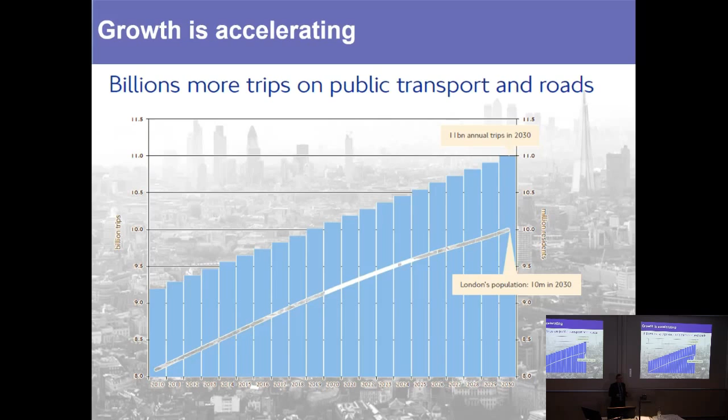That increase, just so you get an illustration of what it means, by 2030 is like taking a city the size of Birmingham and chucking it into the middle of that picture. And if you try to understand what that might mean in terms of pressure, from a London Underground perspective, that's equivalent to 2 tube trains every week.

So it's not the overall numbers that is really the challenge here. The challenge is the growth and how we keep up with that growth. If you start to take those growth figures and look at how that might affect the station environments we have to deal with, this is the picture.

This is the picture based on the amount of investment we're currently planning to make. And what this says is that 80% of those Zone 1 stations will be at Fruin Level C by 2031. Fruin Level C is more than 4.5 people a metre squared. I don't know whether you've ever stood in a telephone box with 3.5 of your friends - it's probably a pleasure you'd have to pay for. But ultimately, that gives you an illustration of just how crowded parts of these stations are going to be, and the challenge that faces us.

It renders it inoperable. You may think it's about getting passengers into these stations, but actually sometimes it's more important to get people out. Bond Street is a good example of where we've invested a lot of money in a faster Jubilee line, moving to 33 and eventually 36 trains per hour. Of course, if you can't get those people off the platform and out to enable the next train to arrive, then you have to run non-stopping. And instead of buying jewellery in Bond Street, they're whisked off to Swiss Cottage, where all you can buy presumably is a cuckoo clock.

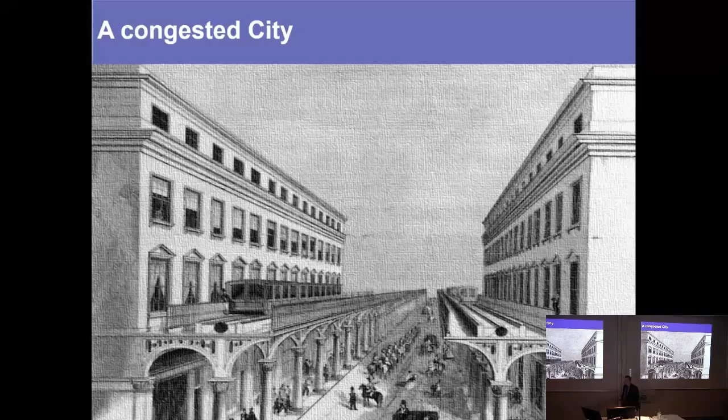Several ridiculous ideas were formed as to how we could get people from the outlying terminus stations into the centre of London. This is the Great Victorian Way, an idea by Paxton - I suspect it could really upset your afternoon tea to have that thundering past your living room window. But in fact it anticipated the route of the Circle Line eventually, though it didn't fly. This is a more amazing idea - transporting people in a vacuum tube. I couldn't find any reference to how you were going to breathe, but anyway, I suspect it could form havoc with your top hat.

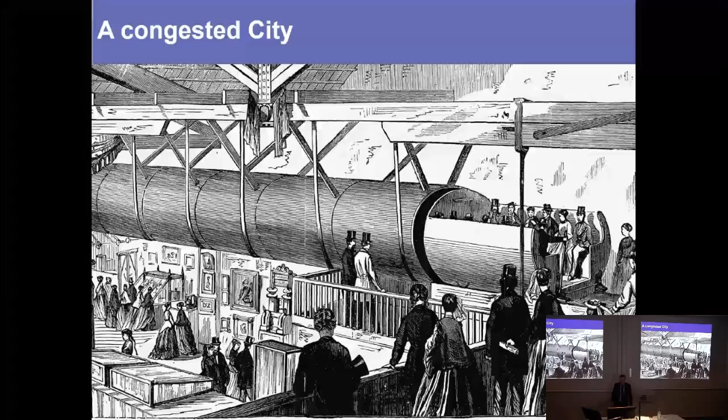And into the middle of this came this lunatic. Charles Pearson was a solicitor to the City of London, and he was a real reformer - emancipation, trying to take bribery out of juries, penal reform, universal suffrage, capital punishment. There didn't seem to be an issue in which Charles wasn't engaged. But one of his great interests was transport, solving this problem.

He had previously suggested a single train station in the centre of London near Blackfriars, but that had been turned down. In the late 1850s he starts to release these pamphlets proposing the concept of underground railways. You can imagine the reaction from the top-hatted, horse-drawn, manure-splattered hoi polloi of Oxford Street - he was immediately pilloried, and there is plenty of evidence to say that. But Charles kept going and actually managed to get this idea accepted.

Here is a picture in 1862 of Gladstone and Fowler, an early underground engineer, on a trial run of that initial line. Unfortunately Pearson didn't make it to see this - he died in 1862. Typical of the man, actually, that he was offered a great deal of money by the railway company but turned it down. That money was later given to his widow.

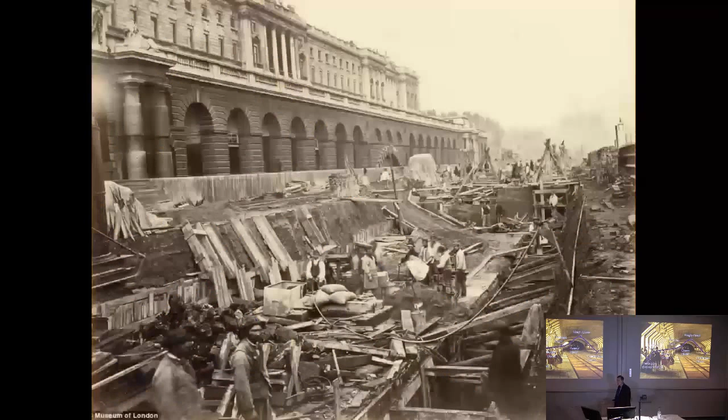Following this initial success, there was a real drive towards creating this capacity to take away the challenges of Ludgate Hill. This is just outside Bank in the 1880s. And of course today we've returned with our partners Dragados, and we are creating similar chaos, although everybody is wearing hard hats now. But we're renewing some of those early capacity drivers.

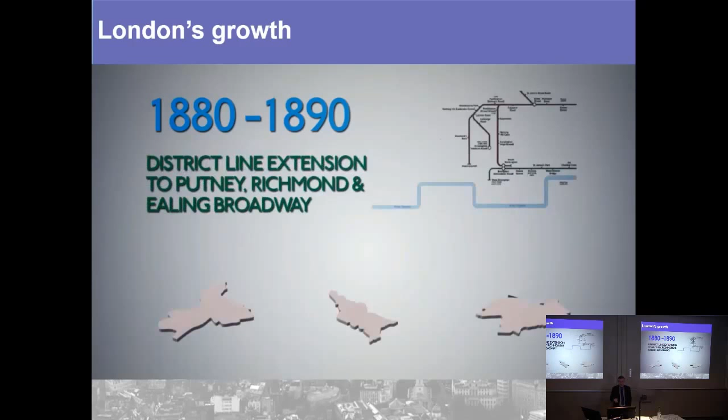And this continued - here you see the growth that was created as these lines were built over a 10-year period. The District Line linking these villages together to create commuter traffic, then some really dodgy property deals as the Metropolitan Line is extended to Aylesbury. Then the Northern Line extension to Morden, which I'll talk about in a minute, opening to a working farm. The Piccadilly Line extension to Cockfosters, 5 of those 8 stations to Cockfosters underground. The Northern Line extension to High Barnet.

And then after the Central Line extension to West Ruislip, as you step through that, I've gone back to the Office for National Statistics. So in those infographics you see the rise in population that's being driven every time you extend these lines. So maybe Kevin Costner was right - build it and they do come.

Here's a picture of Morden in 1890. It's a bit out of focus, apologies for that, but as you can see it's just a series of fields. And here, on the site of Morden Station in 1920, a working duck farm. Now, can you imagine going to George Osborne today to say, I'd quite like to build a very expensive railway to a duck farm?

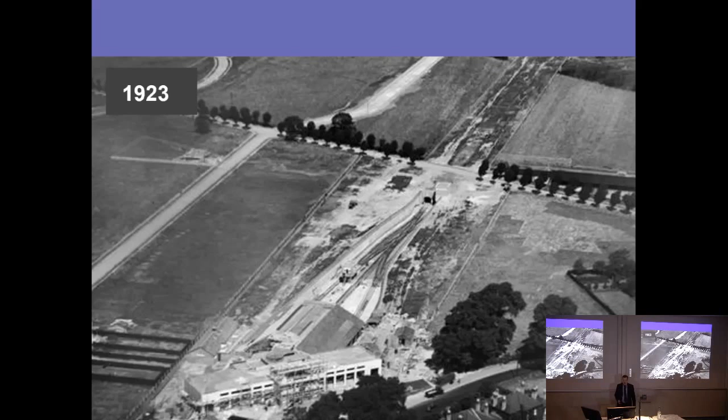But it really gives you a sense of how adventurous this exploit had become, that they were really building a new London, a new suburbia when they were extending these lines. And here in 1923, the commencement of that, in open fields as they build Morden Station - this is also 1923, but actually Morden was completed in 1926.

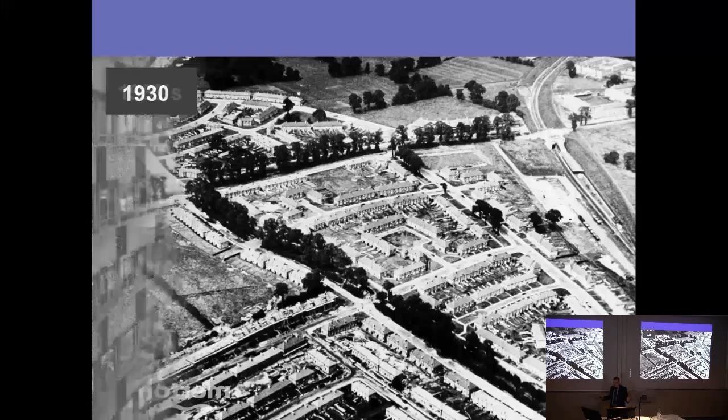And just four years later, you see this explosion of housing around Morden Station. And as you track through to the 50s, how that's built, we start to get high-rise. And then in the 2000s, I arrived - I didn't live too far away - and if you were sitting there in a car outside Morden Station, you might be able to get out of London within half an hour. Just an extraordinary expansion.

And there were some very extraordinary people behind all of this. This is Albert Stanley, later to become Lord Ashfield.

He's somebody who was born in the UK, but he left school at the age of 14 and joined the Detroit Tram Company. By the age of 17 he's running their timetable, and by the age of 20 he's running the company. He then takes four years off and goes into the Navy, and by the time he is 30, he's running a very major transport organisation in New Jersey, an organisation of 25,000 people. So he's obviously an extraordinary person from that.

But the thing he brings to this story is that he comes back to London and he forms the Underground Electric Railway Company, bringing together a number of disparate businesses, some of them loss-making, to start to build this gravitational effect around the way that we treat transport in London.

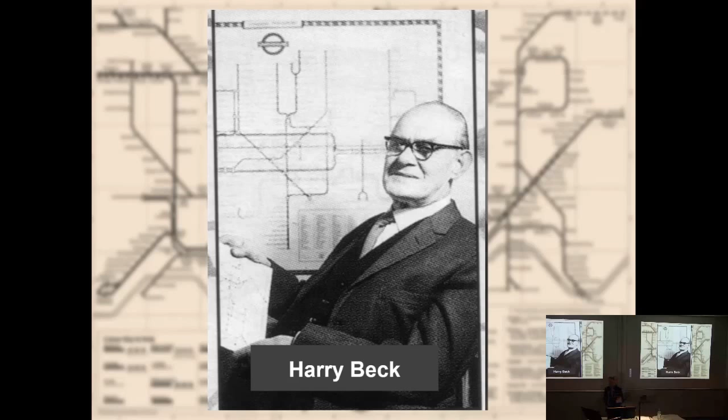And this chap doesn't really look like an innovator, does he? But actually, I think he speaks to how London Underground innovates. This is Harry Beck, an electrical engineer who, in his spare time, developed the London Underground map. He was rejected on several occasions by the design committee, and indeed I think they tried to make him redundant halfway through this process, and never really gave him the credit that I think he deserved for developing that map. I think a lot of the innovation that we talk about with London Underground comes directly from these people.

Now, I've built you this little animation. So I went back to the National Statistics Office and I looked at the population of all of these boroughs.

I wanted to build an animation showing how the city has shaped over these 150 years. In 1860, just before we arrived, you get this very centralised, dense population in the centre of London. Now look what happens: that central density starts to be taken out, and as the transport system progresses, you get suburban development, which allows the city to grow across the board. I think that's a great demonstration of what transport has done for the city.

I don't know what the people of 1850 might have thought, what Charles Pearson might have thought about what he was seeking to create when he engaged on this journey, what all of these people thought they would end up with. It seems incredibly unlikely that they could have foreseen this. But there's no doubt that what they did has enabled this.

It's interesting, how should we see the city of the future? How can we push our imagination about what London will be in the future? You might say that we're dense enough, that how could we fit any more in? But actually, when you look at the centre of London, we're just a quarter of the density of Paris.

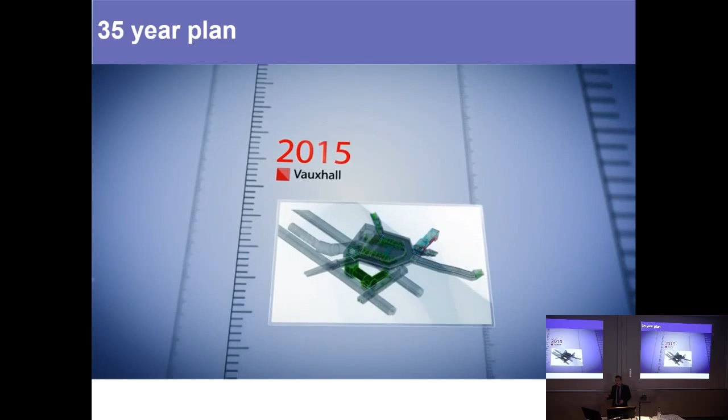And so we're trying to move to these much longer term plans around stations. Some of these are already underway: Vauxhall, Bond Street, Tottenham Court Road and Victoria. We're about to start on Bank. Trying to get these long-term plans which flow from the capacity forecast that we're making helps us align the property interests and stakeholder interests around those, and plan efficiency of our asset replacement programs.

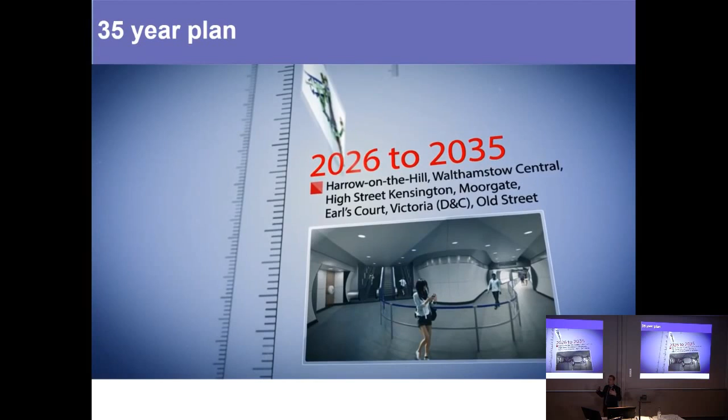And it also helps us articulate the effect of varying financial background and how that leads to inefficiencies. And you may say, well, this is ridiculous to have a plan to 2050 in an environment where you don't know how much money you're going to have tomorrow when the mayor arrives.

And I think my answer to that is that planning is a good starting point. The mayor has a plan to 2050. We should react to that. And I think most importantly of all, Paris have a plan to 2050. And in this year, the 200th anniversary of the Battle of Waterloo, I'm damned if I'm going to be beaten by the French.

I just wanted to talk through some of these schemes. So this is Tottenham Court Road. It's a busy interchange of Oxford Street and Charing Cross Road. Nobody could have anticipated 140,000 people through this station a day at the time that they built it.

This shows you the complexity, the quantum of the work that we're doing there. So in yellow, on the site of the existing ticket hall, we're building a ticket hall that is 6 times the size of that existing ticket hall. In orange, new access routes down to the central line, which allow us to create this more uniform density along the platform, which gets us better dwell times.

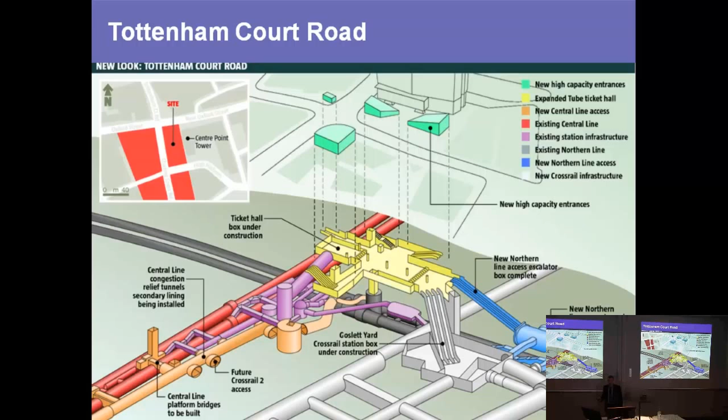In blue, new links down to the Northern Line to get more capacity at the extremities of the Northern Line platform. And then in grey, cutting across the integration of Crossrail and the Crossrail tunnels coming through at that end of the station. When Crossrail kicks in, that 140, 150,000 goes to 200,000 a day. And above you see new entrances.

I'm just talking about some of those technical challenges. I've just taken this cut across the model. Right in the middle, you can see a circle. And that circle is the Crossrail tunnel going through, across the central line in red and under an escalator incline in blue. This tunnel boring machine is the length of a frigate.

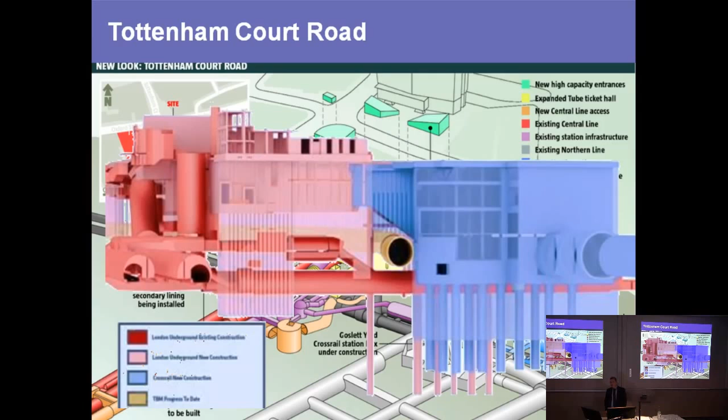You'll see a picture of it later. And I can tell you that the space above and below that tunnel to the two structures above and below is less than a metre. And we kept the central line running while we did that. I think that's an extraordinary achievement by that team.

This is the old ticket hall. When 2 trains arrived, it couldn't cope. It just became full. So this is designed for the new ticket hall. You see the new entrance area from the pavilions. And we've opened it now. On the right-hand side there, you see the new entrance that's going to go down to Crossrail.

On the left-hand side, then, the entrance area down to the Northern Line extension. And here are the 2 pavilions in front of Centre Point, which recreate the urban environment. And already, and it's a feature of these developments, you see people investing money in the area. And you see the retail values, incomparable retail values at the west end of Oxford Street, globally incomparable values, sweeping up towards the eastern end.

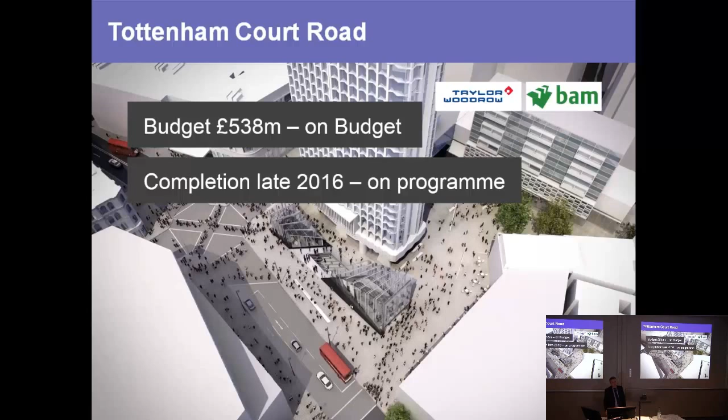And this will change that area of London to the point where it is unrecognisable within the next 5 to 10 years. I just wanted to mention our partners there, Taylor Woodrow and BAM, a joint venture, who have done, as I've shown you, a tremendous job on that project. It's on budget and it will be completed later this year. So you'll have half open now, you'll have the whole station by the end of 2016.

So the greyest picture I can find of Bond Street. Bond Street Station is about creating a new entrance on Marylebone Lane by the Tanzanian Embassy and under an existing listed building.

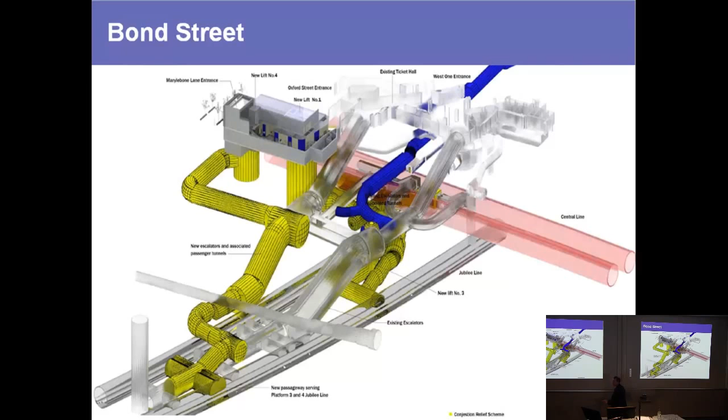In yellow you see the new links down to the Jubilee line, which allow us to spread this density down the Jubilee line and fully utilise this 36 trains per hour. In blue, the link to Crossrail, also new links down to the central line. A rather challenging piece of engineering where that all comes together at the crux of that hockey stick, which would be the subject of a whole new lecture.

If you thought there was plenty of space underground, I thought I'd bring you this, to show you just what's in the area. Underneath here we have the existing ticket hall, and on the top right-hand side the new Marylebone Lane entrance. And you see the problem with utilities there.

Those blue things going across the centre of the picture are water mains, cast iron water mains installed in the 1850s - a 30-inch, a 21-inch, and a 20-inch, I think, from memory. And these things, if they crack, they don't leak, they explode. Having those right above a ticket hall brings memories of Balham, when 66 people died during the war because one of those water mains flooded the ticket hall.

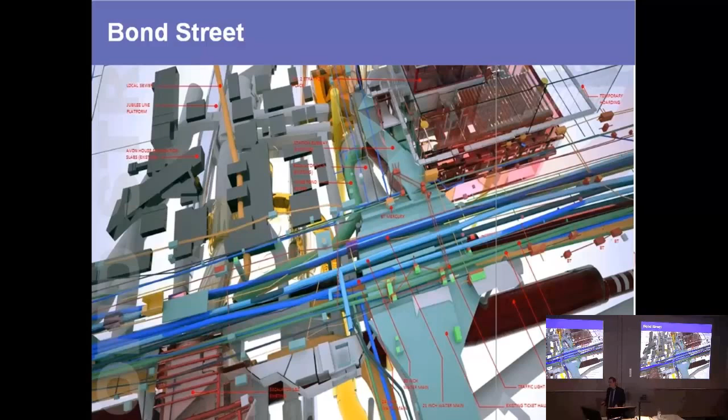So utilities are a major risk for us. Before we got anywhere near Bond Street, we had to dig up the whole of Oxford Street. Imagine all the sensitivities there around the retail quarter and how we were protecting people's businesses, and the sort of chaos that can cause. It's a very intrusive process. So that's some of the challenges we're facing there.

This is the new Marylebone Lane entrance. Again, we're on programme, and we're in good shape to finish in the spring of 2017 with the Costain Laing O'Rourke joint venture.

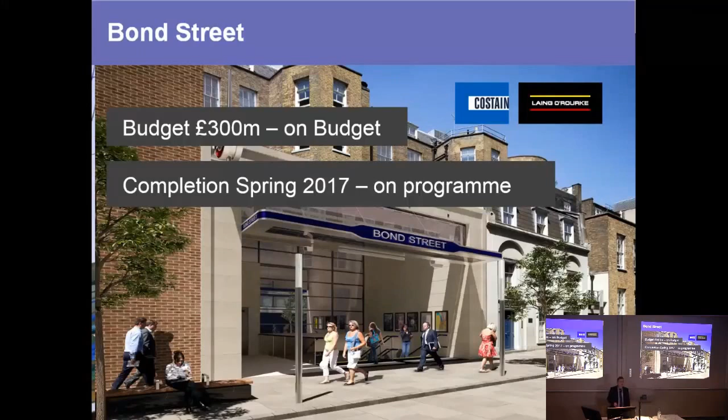Before I got Victoria, we used to sit around the table with some intractable problem, look at each other and go, yeah, but thank God we ain't got Victoria. It's a nightmare area. The ground conditions, it's made grounds and gravels. There has not been a tunnelling job at Victoria that has ended well. So it's a phenomenally challenging scheme.

This doesn't tackle, because of cash constraints, the district and circle line work that we'll have to do later. We're doing this job in two halves simply because we haven't got the money to do it efficiently and together.

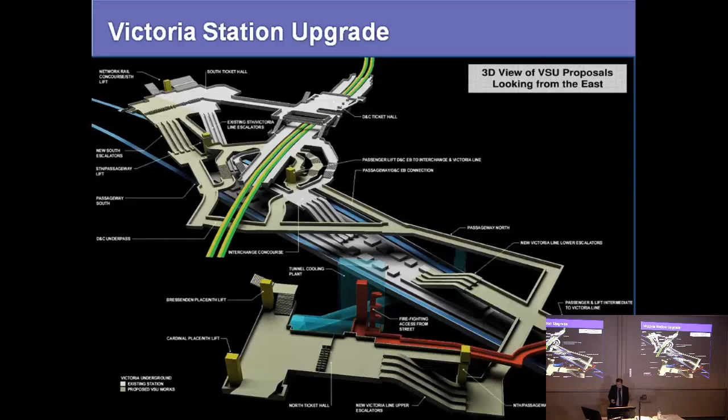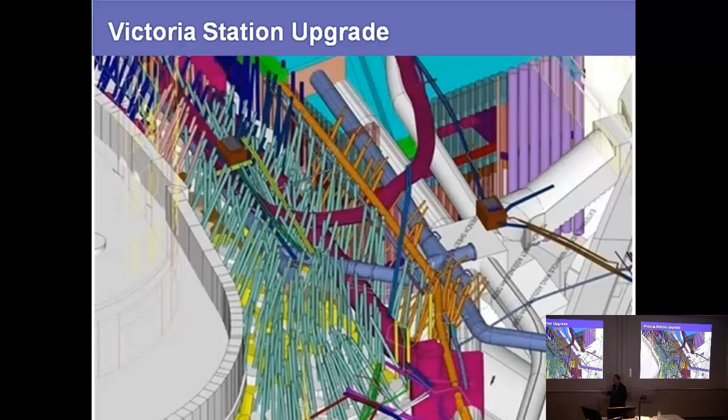Another piece of digital engineering, this showing the jet injection grouting columns that meant we could full-face tunnel through grout. This shows you the view over a road. We had to sleeve all of those grout positions between the existing surfaces, take sections of the road before we could do that ground treatment. And in fact, those grout positions, those column positions, are all set out directly from the model.

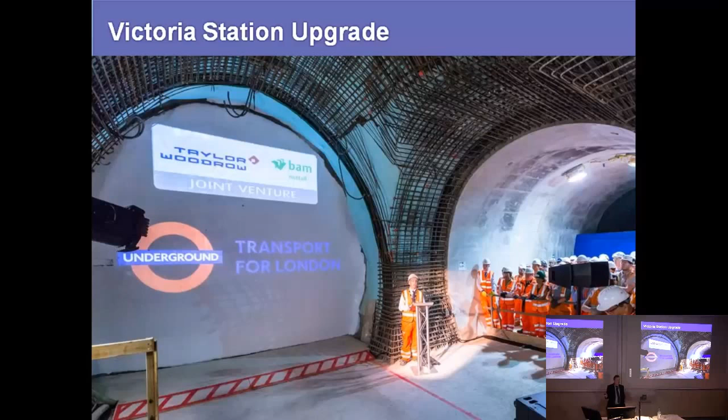This was a great day, because this is the first time - as the tunnelling is completed - this is the first tunnelling job that ever went well at Victoria. It's a fantastic achievement. Here's a view of the northern ticket hall, and here are the entrances, here's the entrance outside the Network Rail Station - again on budget, on time to finish in 2018.

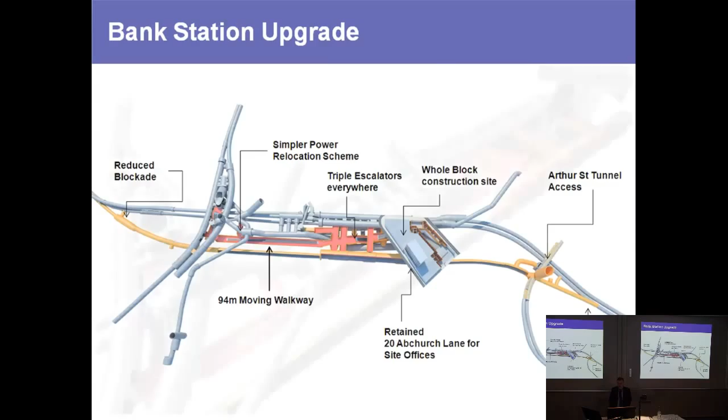Bank pushes the challenge even further, because it's absolutely at capacity. Bank closed 63 times last year because it was just too crowded. There's an amazing operational team down there that reconfigure Bank throughout the day to try and use the station they've got to keep it working.

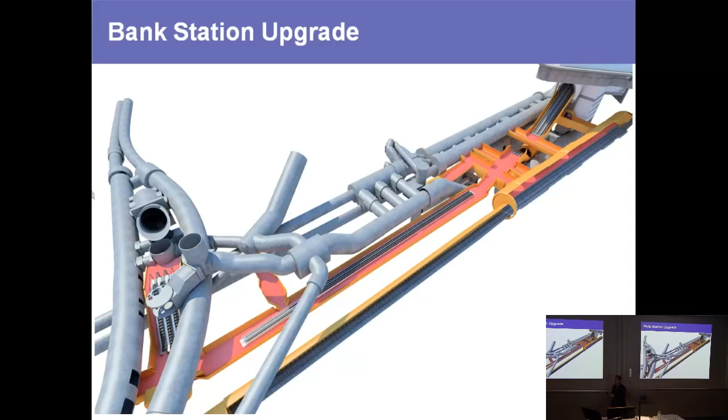The solution there is to realign the southbound running track of the Northern Line so that we can create a central concourse, and then put a new entrance in the middle of this very distended station, so that we can create vertical capacity in the middle of the station.

This is the new platform on that southbound tunnel, going in for 2021 with our partners Dragados. Interestingly, we tried a new procurement process with this, and it speaks to how working more closely with the market can bring tremendous results. We produce more capacity in this country on these station projects per pound than anybody else in the world, so we're very good in terms of getting value out of the money we spend.

Yet we went out to the market to market test the solution. It had so much latitude in it that you could have come back with an app - you could have solved it with a pure technology solution. So we allowed the innovation to breathe. All four bidders came back with a much better solution, and the winning bid fundamentally changed the layout of the station. The result was a value improvement of 50% against our own business case. I think that's a real testament to looking again at how we work with industry to get much better improvements. Yes, there was a 23% reduction in cost, but when that's forgotten in 50 years' time, there'll be a 90% improvement in journey time. This will be a machine that works better for our customers in the future.

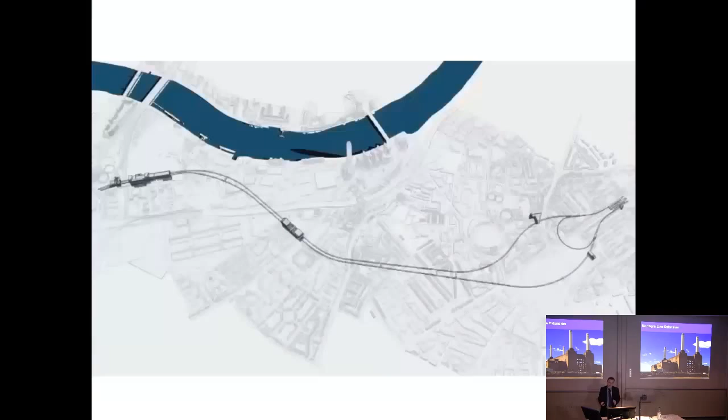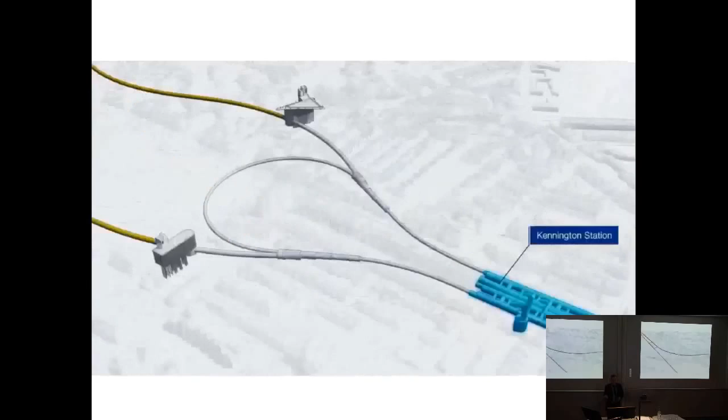This is the Battersea end of that job. You see the overrun tunnels under the Battersea Dogs Home, the Battersea Station and the crossover box, Nine Elms serving the American Embassy and the regeneration area, and then the connection into the Kennington Loop. The first extension of the underground for a very long time - decades.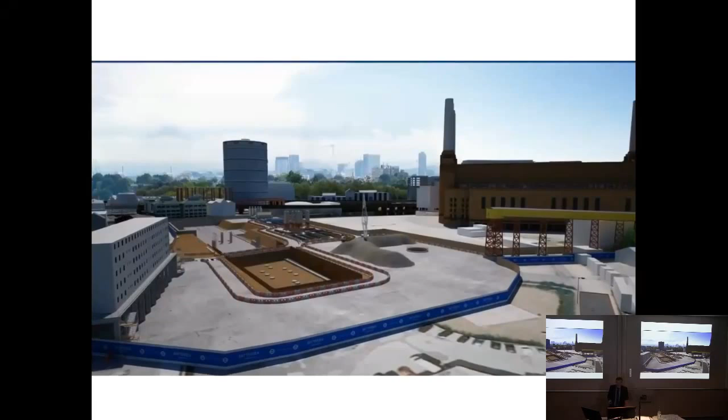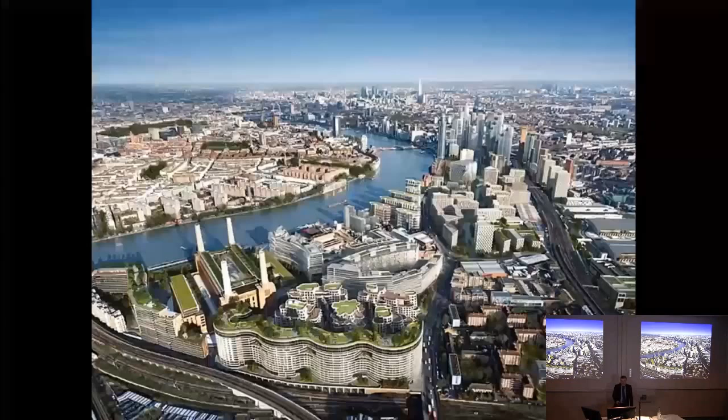And I do love these animations because they stupendously oversimplify the process. If only it really was like this, it would be fantastic, wouldn't it? But it gives you an idea of the scale of it, I suppose. There's a Gehry and Foster building over the top of that. If you're looking for the Gehry building, it's the bit with no right angles in the middle - so that's helpful.

As you can see, it's a major redevelopment of this area - 18,000 new homes, and a changed face of London. An incredible opportunity for regeneration of London, and a brilliant opportunity for a selfie. This is me looking up the Battersea Power Station chimney before they took it down.

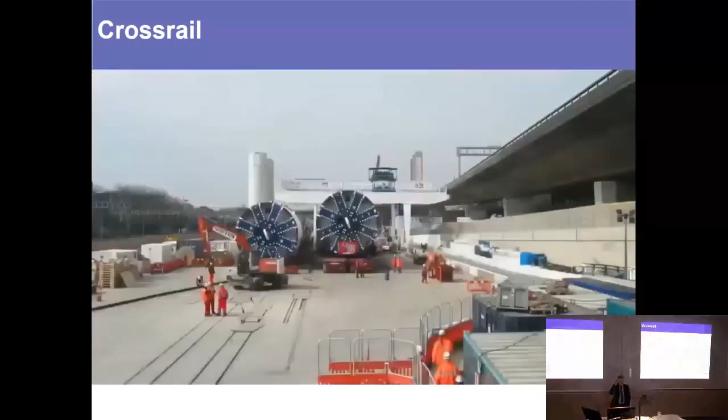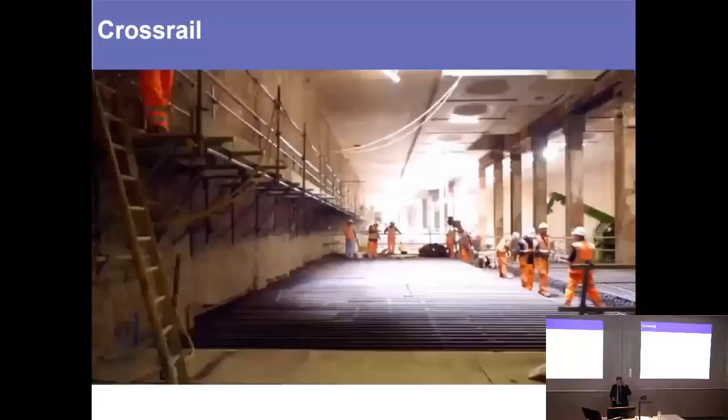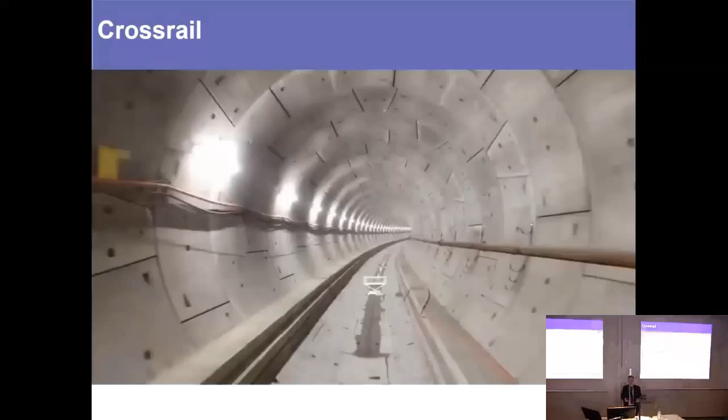Sorry about that. And then we come to Crossrail. Here we are, going in - there's that tunnelling machine we flew through at Tottenham Court Road, you see the scale of it now. And we're going in through the Paddington portal. I think people are going to be absolutely staggered when this opens about the scale of this. These trains are twice as long as an underground train. It brings a 10% increase in capacity, meaning you can get from Heathrow to Liverpool Street in 35 minutes.

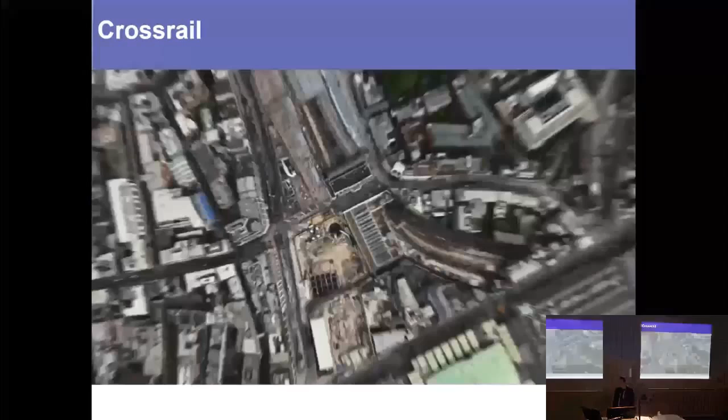It changes the game in terms of unlocking housing across London. It's a staggering piece of engineering - the largest infrastructure engineering project in London. And yet that 10% is all gone by 2026. Even on the conservative growth figures we're putting forward, with the biggest infrastructure project in Europe, it's sunk by 2026. That really speaks to me of the challenge we are facing here.

That is why we are advocating very strongly for Crossrail 2, to bring us the next 10% - a north-south route. And if you think these things are easy to get through - in my drawer at work I have a feasibility study of the Chelsea-Hackney line from 1957. This was around at the time when the Victoria Line was authorised. So this is a long game. And actually, if we're going to live up to the legacy of our forebears, we're going to have to get a bit of a wiggle on.

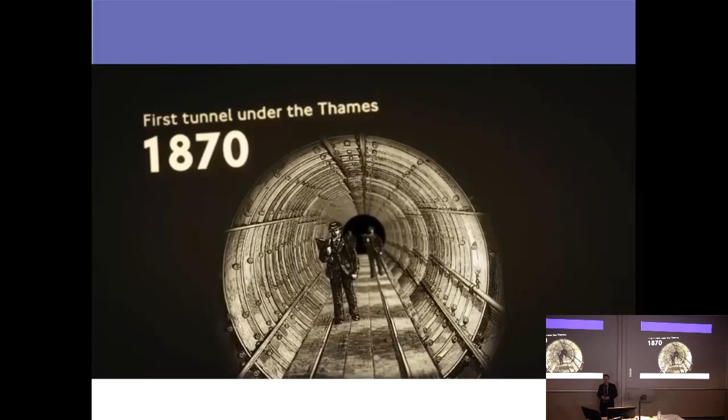When I say passenger numbers in London Underground double every 35 years, you may think of us as quite a staid organisation, but actually, at the heart of coping with this has always been innovation. Because you never could double the size of the network within that period, it has always been a game of trying to get more out of existing infrastructure, increasing our passenger offer, and changing how we dealt with our customers and how those train systems work.

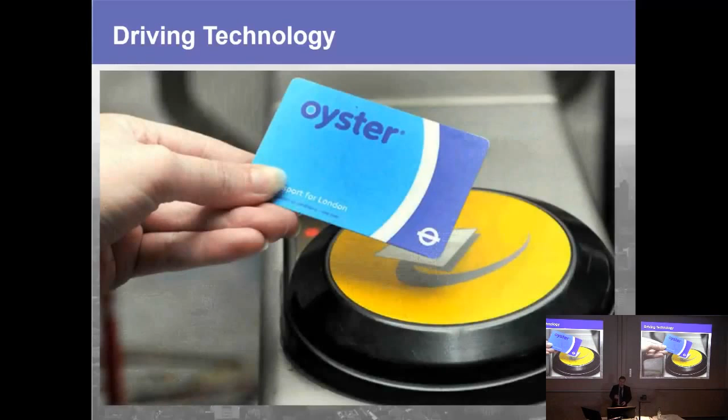Here in 1969, the world's first automatic railway. We talk about the digital railway today, but even back then we were adopting very significant innovation. At the heart of combating this growth, it's not just about building more, it's about how we change ourselves, how we modify ourselves in these intransigent cultures to get more out of what already exists. I wanted to speak about 4 areas.

The first thing is how existing technology changes some of the ways in which we communicate with our customers. There are 500 travel apps out there at the moment, and we've moved from the corporate to how we outsource that process. Very early on, we released our transport data, which has enabled people to develop apps that are useful to them.

If we had developed these apps ourselves, we'd have one app, wouldn't we? And it would probably serve nobody's interests. As it is, there are 500 apps and 6,000 registered app developers, and it's changing all the time. I personally use Citymapper, and I think the way it integrates bus services and our services across Transport for London is really superb.

Second thing is, I think digital technology is changing the way across the industry that we build. When I think about Victoria, I wonder how we'd have done it without digital engineering. And anybody who's watched the rugby at the weekend and been to the Aviva Stadium in Dublin, how exactly would that have been built without digital engineering? Or Birmingham New Street. It's changing the way we look at these problems and helping us understand them in a new way.

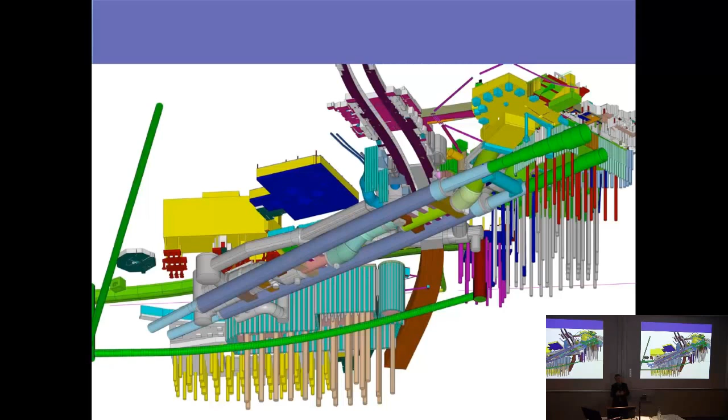And then, of course, there's the way in which we communicate. We all use email habitually, we're just satiated with email at work. But some of the younger people entering our business today do not use email in their normal day-to-day work. I can't get hold of my 14-year-old, but by Snapchat.

It's sort of like taking people, bringing them into your business, and asking them to use Morse code to communicate with each other. If we're going to attract the best people, we've got to find a way of evolving in how we communicate with our staff and with our customers. I think this presents us with as many opportunities as it does risks.

Engaged businesses are successful businesses, productive, safe, and happy places. The means to communicate with our staff in a different way, and for our staff to work differently with each other, I think will play out over the next 5 years, and we'll see a really exciting change. Second thing I wanted to talk about is property, really.

Last week, we placed 13 joint ventures with property partners. As the funding model changes for us, we've got to look at how we exploit our estate, and we're looking at 50 to 75 schemes at the moment with those property partners. This is a scheme developed at Whitechapel by my team to exploit the air rights above Whitechapel Station. You see it on the front of the Tower Hamlets vision.

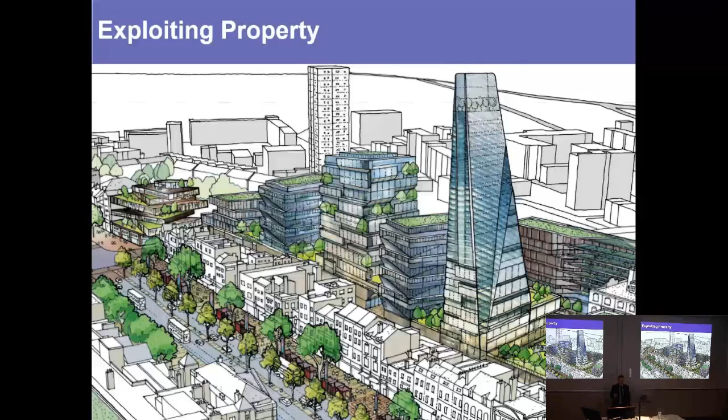It will really change Whitechapel. If we're going to change our funding outlook and properly exploit that estate using those joint ventures, I think our ambition will be no less than becoming one of the biggest, if not the biggest, developer in London. We've got lots of challenges, like how those commercial models work with the constraints of the operational railway, but there's a real passion to overcome those. So you'll see us developing as a developer.

Next thing is housing. So if you thought transport was high up the list on the mayoral agenda, you should look at the housing.

London, it is calculated, needs 620,000 houses within the next 10 years. I don't think it's ever built more than 25 or 30,000 houses.

In some respects, the development we're playing to will create some of those, and some of the transport investment we're making encourages people to invest around that housing piece. But we are now looking at how we can serve those emerging mayoral agendas, and how we can look at becoming not just transport, but potentially transport and housing in London. Because we can deliver, we've got land, and we're very close to being part of that mayoral toolkit.

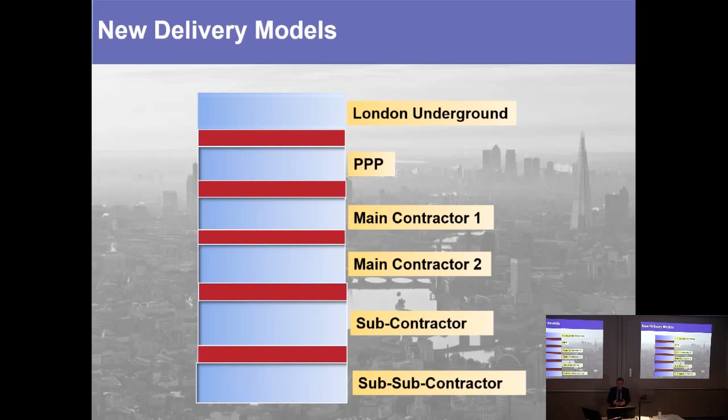Everybody really is struggling with this model, so how can we move to a new one? There's a lot of debate in the industry about what that might look like, but for my money, I think you'll see owner-operators starting to drive more direct relationships with the means of production - the people who actually produce the assets and the parts of the assets that they need.

They'll need to do that because we'll need to use the data to get better operational outcomes. But of course, we're an operator, so I think we'll be looking to recreate some of the processes we used at Bank so we get that early engagement. I'm talking about all of these relationships running over a number of schemes, a program of schemes - that tier 1 integrator relationship repositioned to integrate our supply chains, drive better operational outcomes, and be incentivised around those outcomes.

I think you'll see the nature of design change as we bring those supply chain relationships into the design. It means us taking back much of the risk, and I think that's been at the heart of the formation of the orthodox model we've got today. So I think you'll see that change.

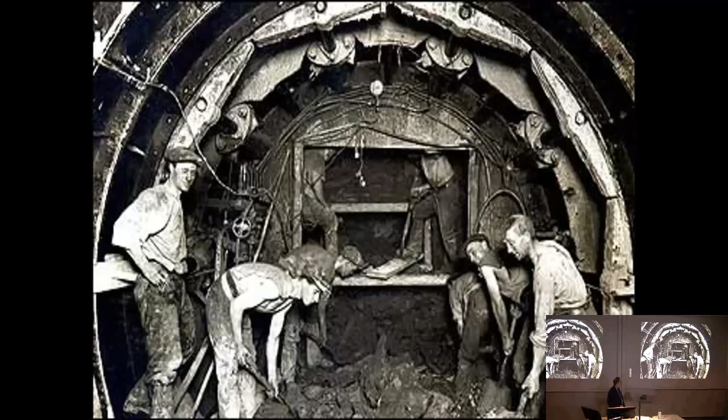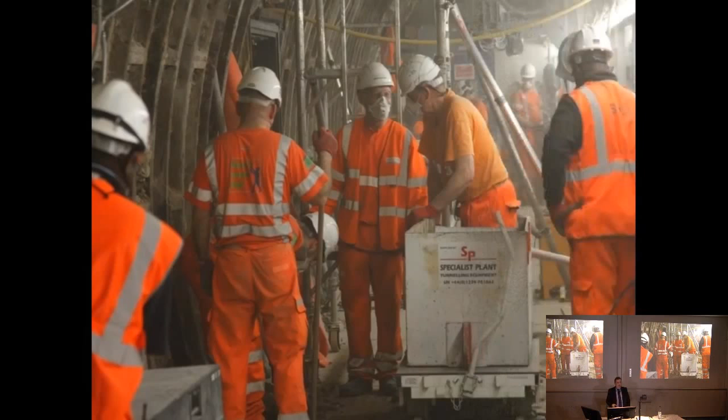In many ways, I recognise these people, these faces - they don't look that different to the faces you see today. They're people working in challenging working environments who are hewing out this new infrastructure. People like to see infrastructure as pictures of tunnelling machines that I've shown you, but actually most of the time it's mostly like this. That skills shortage will be a very big challenge for us going forward.

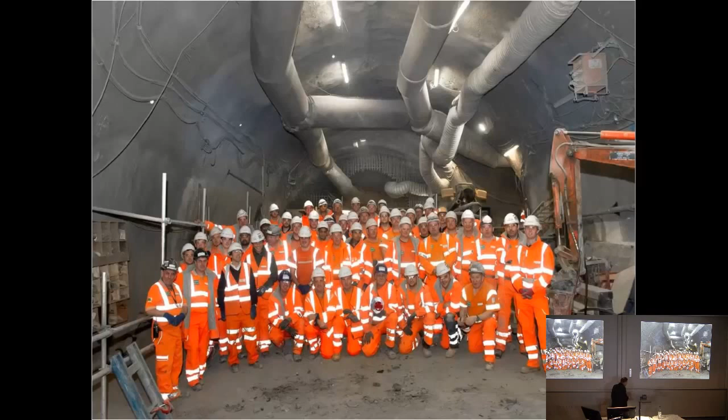When it works well, and this is the brilliant team from London Underground, you can't see the divisions between these people. You can't see what organisation they come from. They overcome the contractual boundaries between them and act as one team with one objective. That is what we've got to move to. And fundamentally, I think when I talk about this innovation, it's not really about technology or engineering.

It's about behaviours, and it's about people, because it's all about trying to encourage how organisations accept new technology and new ways of doing things.